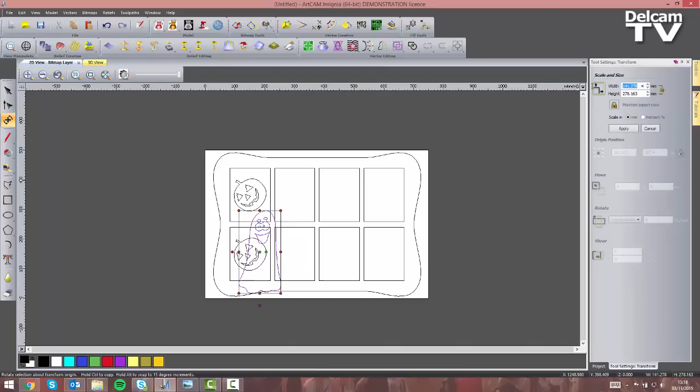Now let's import the ghost. Let's enter the Transform tool again. The width is going to be something around 69 millimeters. Height automatically calculated. Click on Apply and rotate this by 45 degrees anti-clockwise. And then we're going to center it in this rectangle. And then create a copy. Paste it and move it. Center these and we're done with the ghost as well. Let's import the bat.

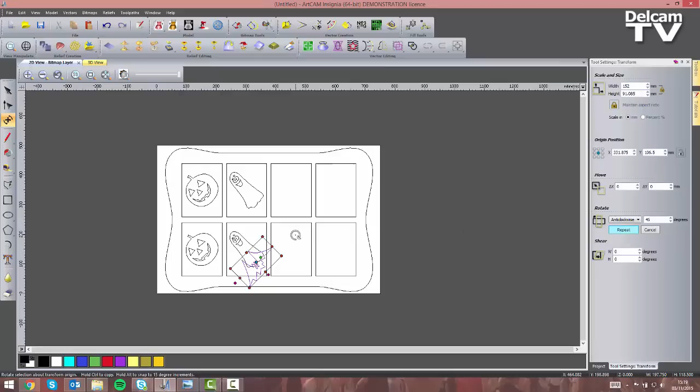So we're going to enter the Transform tool again and scale its width to be something around 152 millimeters. Click on Apply and then rotate these by 45 degrees anti-clockwise. Close the form and then center these. Let's create a copy of these, paste it and move it, and then center it again.

Now to fill these two rectangles, we're going to create text vectors. So you can choose the font and the characteristics you like. I'm gonna go with these ones, and I'm going to type trick or treat. Click on Create. And then I'm going to enter the mirror tool because we want the text to be in the right order on the chocolate rather than on the mold. So I'm not going to copy the original objects and I'm going to mirror these, choosing this option.

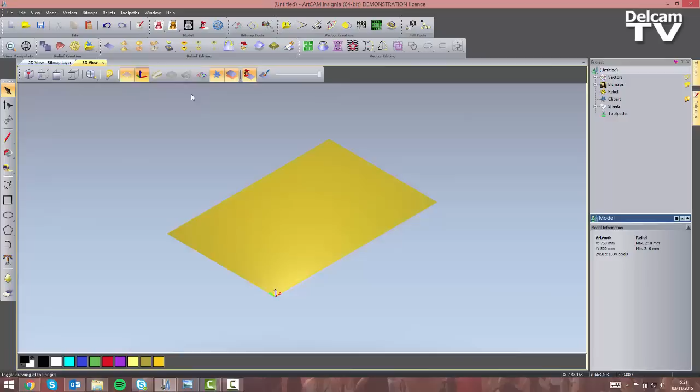Close the form and now we can enter the Transform tool and rotate these by 45 degrees anti-clockwise. You can close the form and center this vector. We're going to copy this again, paste it and move it and center it again. Right, so we are done for vectors creation and we can get on the 3D view, display the vectors and select a view from the top to start to create 3D shapes.

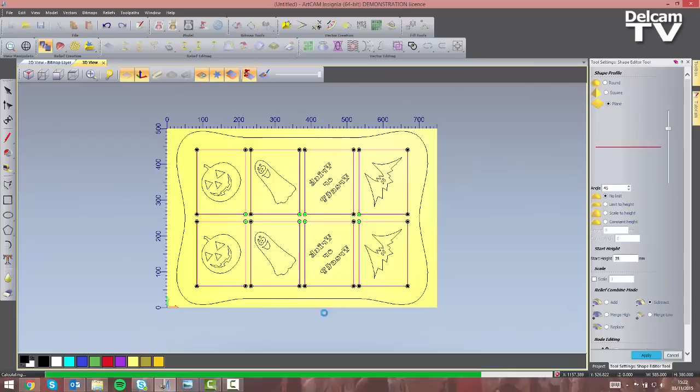So I'm going to select these 8 rectangles and I'm going to enter the shape editor. You can do this by clicking on this icon or by pressing F12 on your keyboard. So I want a plane, I want a start height of 35 millimeters and I want the relief combine mode to be set to subtract. So click on Apply and you can see the results. So we can close the form because we want to add some draft.

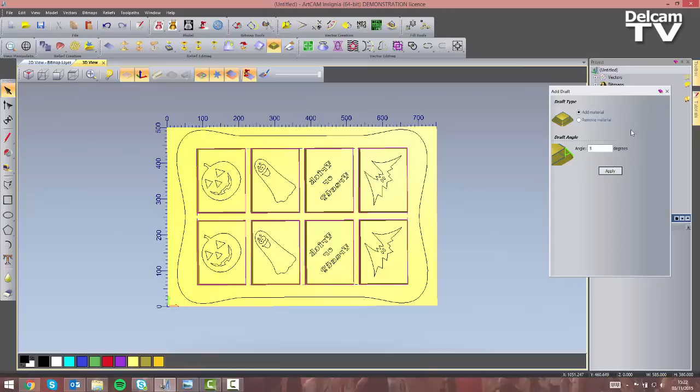So let's enter the draft tool and let's say we want to remove material or to add material. In this case we want to add material and we want a 5 degrees angle. So click on apply, and you can see the draft has been applied. You can close the form now. Now, for the outermost vector, we want a planar shape again, this time 50 millimeters high, and we want the relief combine mode to be set to add, to have this result. So click on apply, and we can close the form again to start to see the results.

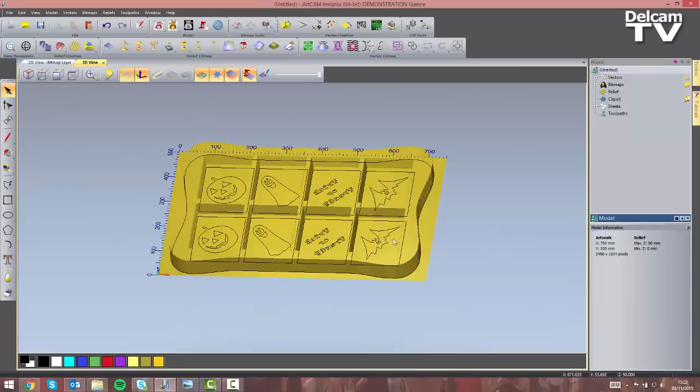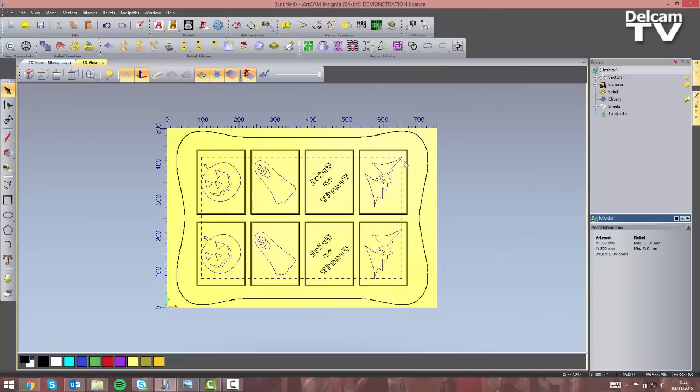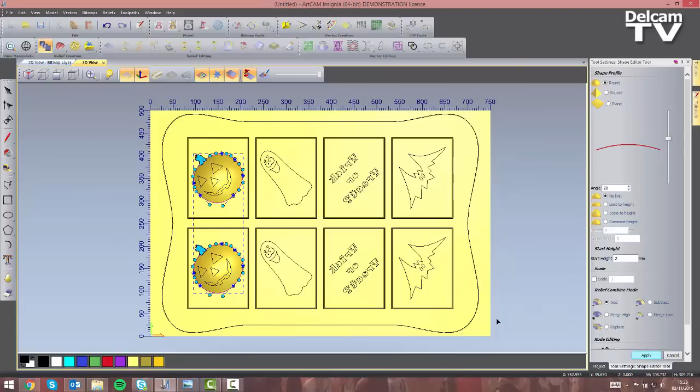If you're happy with these, we can start to edit the shapes of these vectors. But first of all, we need to select all of them. So shift select them, all the ones we've created, and we want to ungroup them all. So right click, ungroup all. Let's start with the pumpkin. Let's select both of the outer vectors, enter the shape editor, and select a round shape with a 20 degrees angle and a start height of 2 millimeters. Add this time and click on apply. I'm not going to close the form because I will need it for the rest of the vectors.

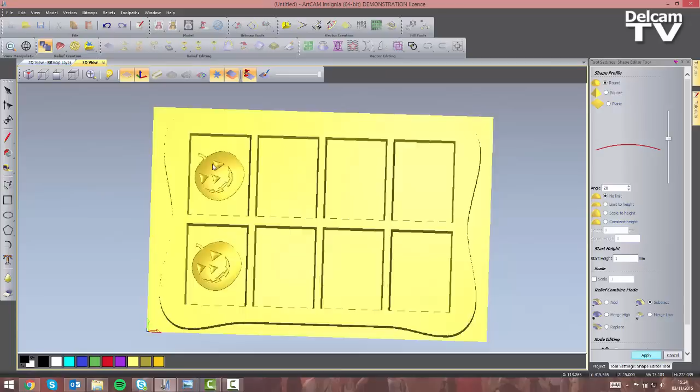So select the eyes, the nose and the mouth for both pumpkins. And we want a round shape, an angle 20 degrees again, start height of 1 millimeter only, and relief combine mode set to subtract. Click on apply, and this is the result. Now, we can start with a ghost. So select the two outer vectors. We want a round shape again, 20 degrees angle, start height of 2 millimeters, relief combine mode to be set to add, and click on apply.

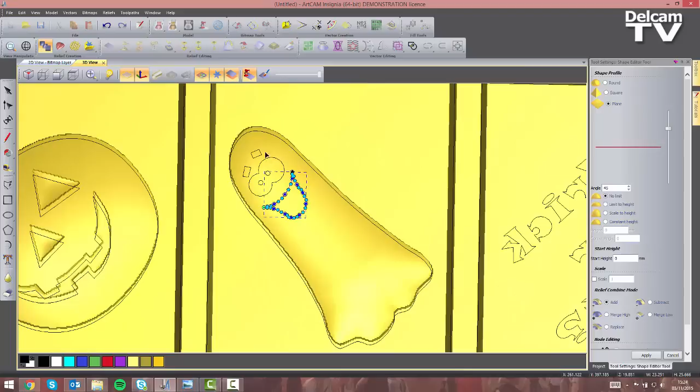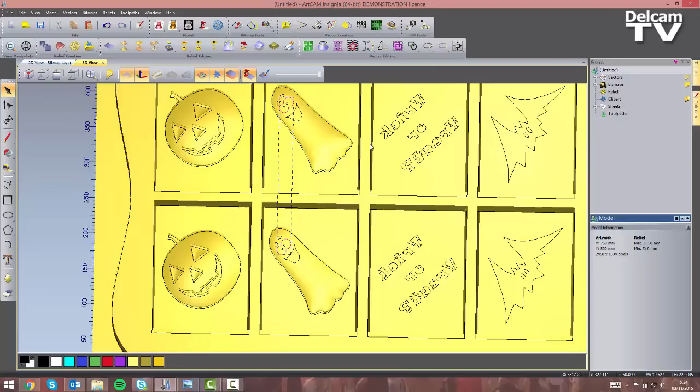So now for the mouth, the eyes and the eyebrows, we are going to set a different shape. But first of all, we need to join the eyes with coincident nodes, as we haven't done this before. So shift select them, join with coincident nodes. We've got 4 vectors and we will have 2. Now we don't want to select the pupils, so we just select the eyes, the mouth and the eyebrows for both ghosts and enter the shape editor. So we want a round shape, an angle this time of 30 degrees and a start height of 0.5 millimeter. Relief combine mode set to subtract, and we can click on apply.

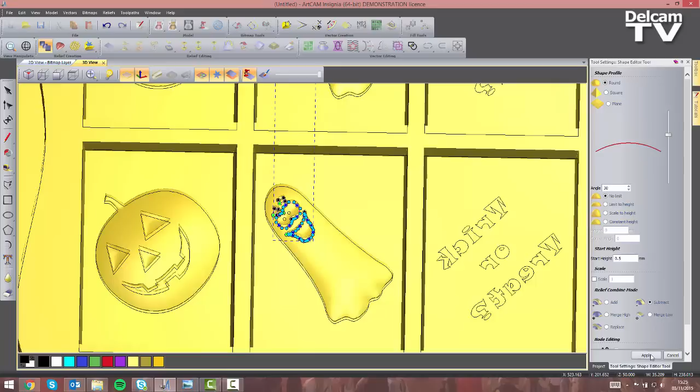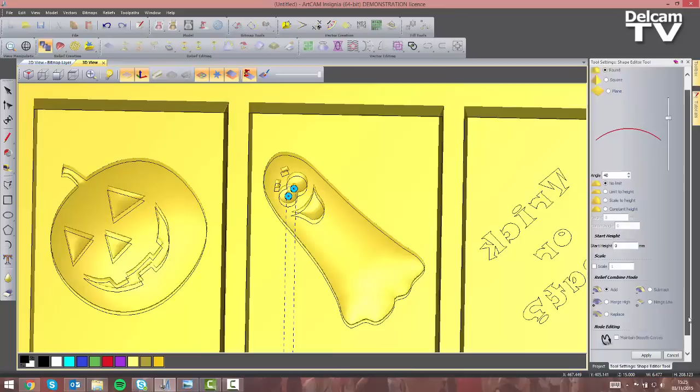And last, we're going to work on the pupils. Select the 4 of them, shape to be a round shape, and we want a 40 degrees angle with no start height and relief combine mode set to add. Click on apply and close the form.

So this is the result we got, and we can now play with the bats and the text vectors. So let's select first the bats, both of the outer vectors, shape editor, a plane, start height of 4 millimeters, relief combine mode set to add, and you can click on apply.

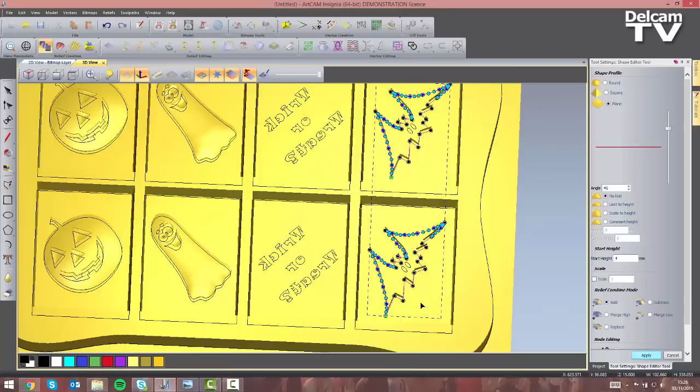For the eyes, we want a round shape, angle of 40 degrees again, and a start height of 0.5 millimeter, relief combine mode set to subtract. You can click on apply and close the form to see the results.

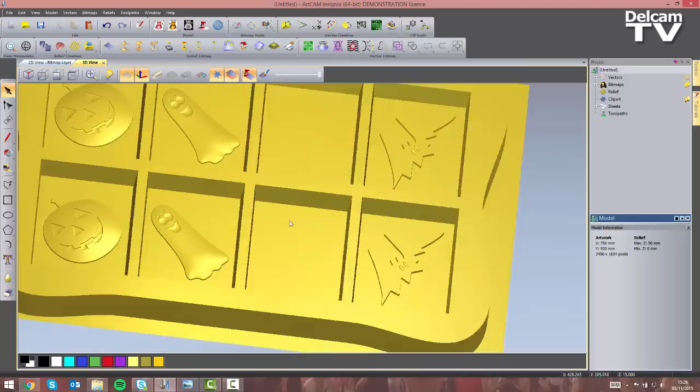It looks nice. We just need to create the shapes for the text vectors, so we're going to shift select them, enter the shape editor tool again. We want a square shape this time with an angle of 70 degrees and a start height of 1 millimeter. So you can see it doesn't look great now.

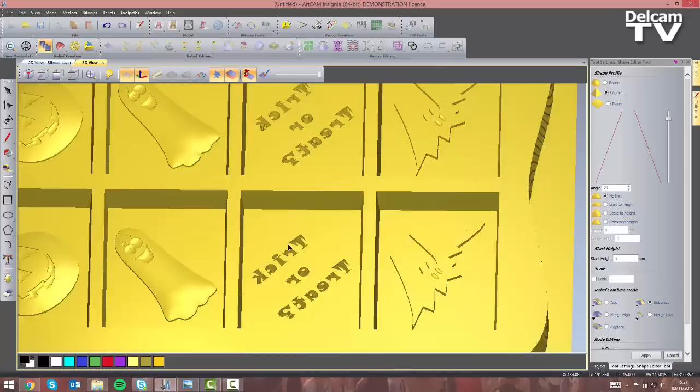So what I'm going to do is set a limit to the height of these shapes, and this limit is going to be 2 millimeters. So you can see it looks much better now. You can click on apply and close the form.

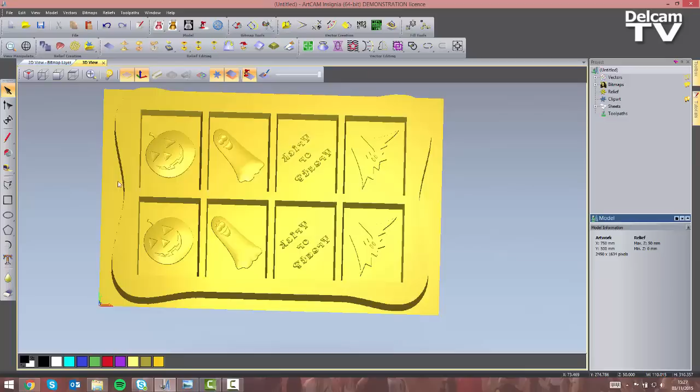Now, the last thing we want to do is to add some draft again to the outer vectors and to these internal vectors. So ArtCAM will automatically recognize we've already applied draft to the slots and it will not touch them. So we can enter the draft tool again. We want to remove material this time. 5 degrees angle will do.

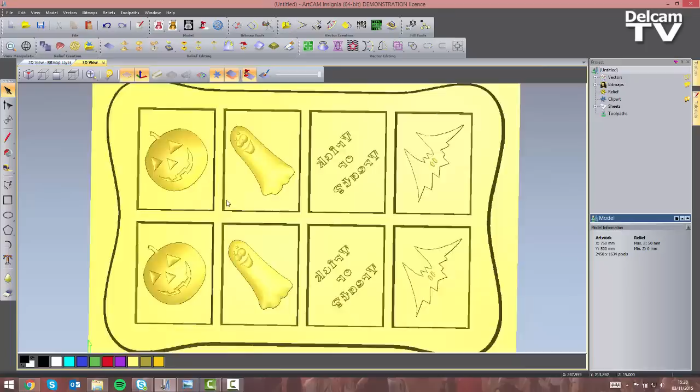You can click on apply and draft has been added both to the outermost vectors and to these vectors. So we can close the form and see the result. You can inspect your design.

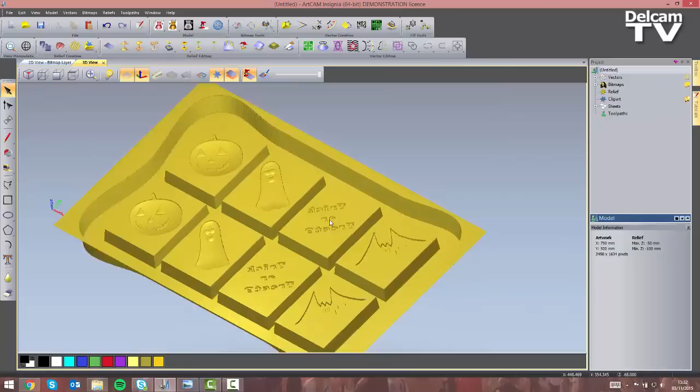And we're now going to select the tools and the machining strategies for this part. So the first thing we need to do is to invert the relief in Z, because we will need to machine the mold for the mold. So let's now click on toolpaths and select a machine relief toolpath. So we want to machine the whole relief and we are going to choose the tools now.

So for the finishing strategy, we want a 1.5 millimeters ball nose. Let's leave these values as they are and let's select the tool for the roughing strategy. We want a 10 millimeters end mill this time. Click on select and we now just need to define the material.

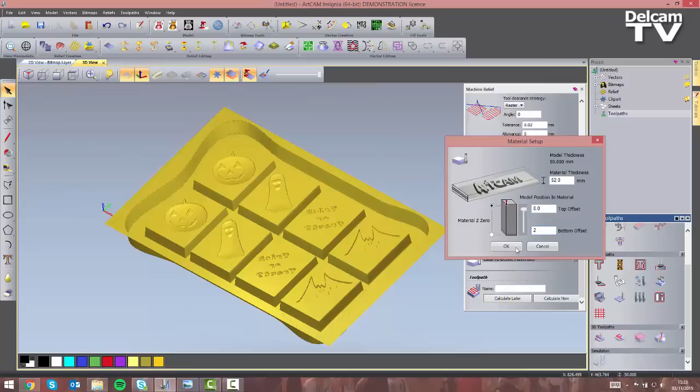So we've got a 50 millimeters thick block, but we want a 2 millimeters bottom offset. So let's set this to 52 and let's set these to 2 millimeters. We want the material Z0 to be on top of the material, so we can click on OK. And let's check the safe Z and the home Z. So they're set to 3 millimeters. It will be OK. And we can click on calculate now.

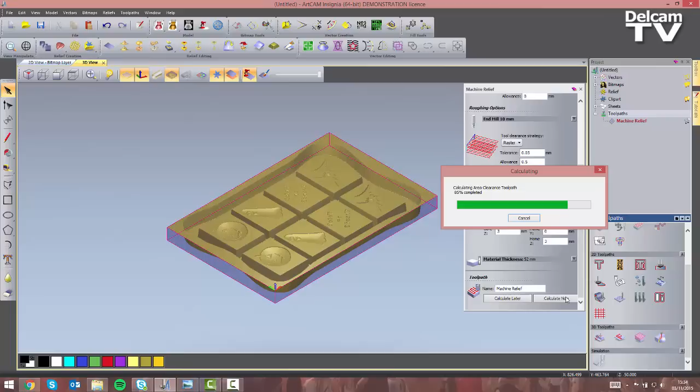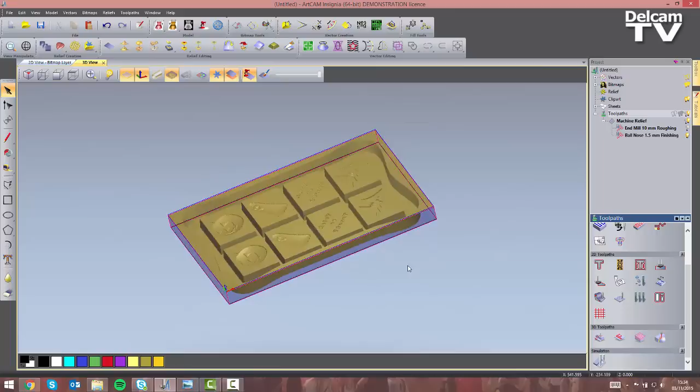So here you can see how our strategies will look like. We've got our roughing strategy and our finishing strategy. So the red lines are cutting moves, while the dark blue lines are rapid moves and the light blue lines you see are plunge moves.

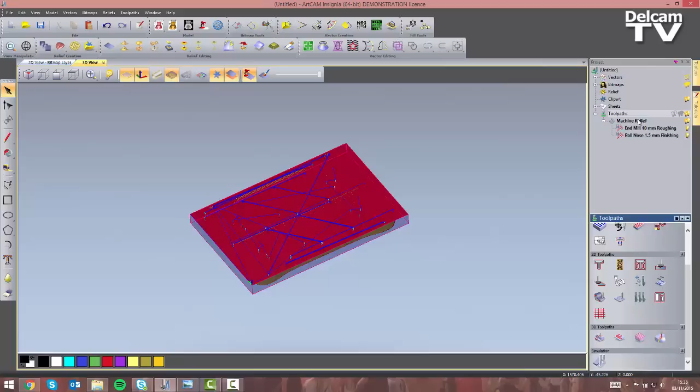So the last thing I'm going to show you is how you can simulate these and export these toolpaths if you're happy with the simulation. So right click on machine relief, say simulate toolpath, just gonna set this to standard and click on simulate. So as you can see, this has taken less than 5 seconds and this is exactly how your part will look like after being machined.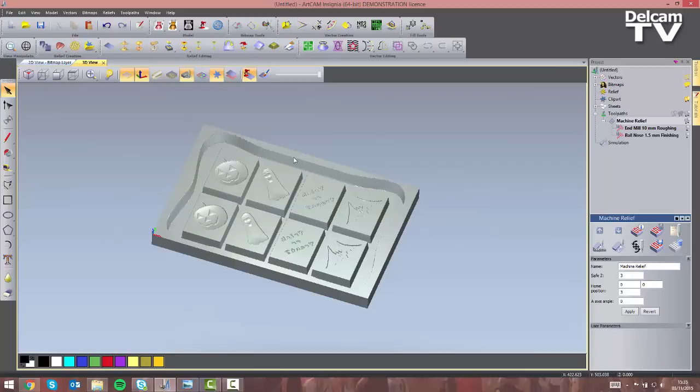So if you are happy with these, you can go on toolpaths and save toolpath as. Just gonna call these Halloween. You can choose the machine file format you want. I'm just gonna go for a standard G code in millimeters. And I'm going to save these two strategies to separate files and I'm going to append their details to the file names. So click on save. And then browsing to the folder, you can see these two tap files and check that everything is alright.

Right, so thank you very much for watching this demonstration in which I've shown you how you can design this Halloween themed chocolate mold using ArtCAM Insignia 2015 R2.